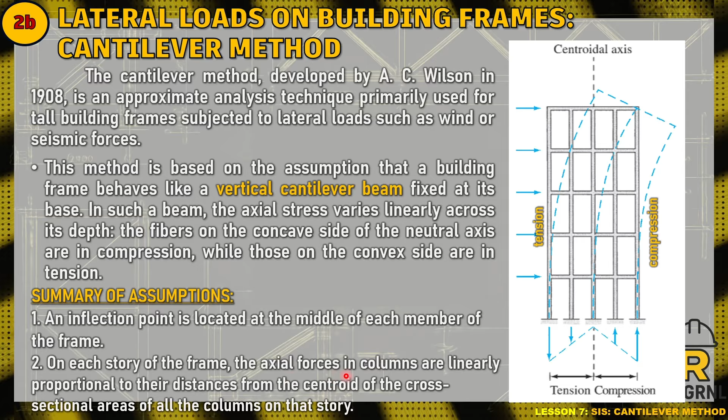In such a beam, the axial stress varies linearly—it's really stress originally. So we had the assumption that on each story, we deal with axial forces. Why forces here? Because it becomes axial force when the area of our columns is constant. But if the column areas aren't equal, it's really stress, which is force over area. That's our symbol for stress. So if we get the maximum or the centroid here, that's it.

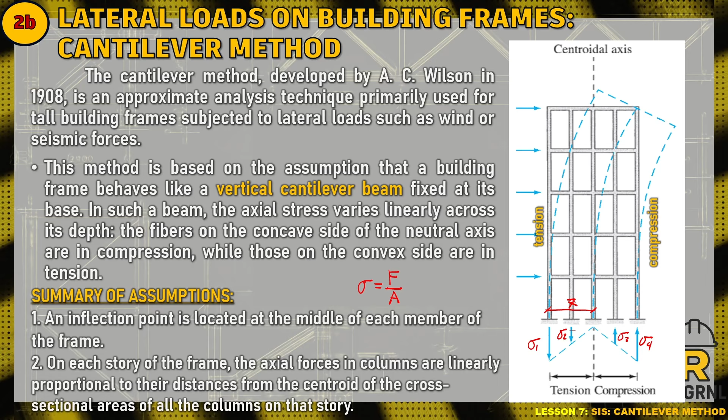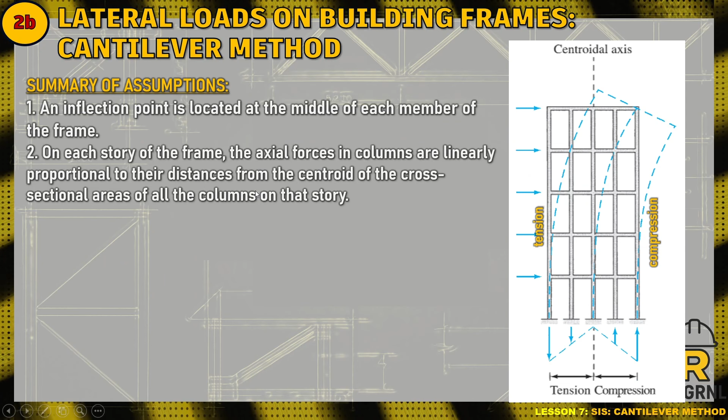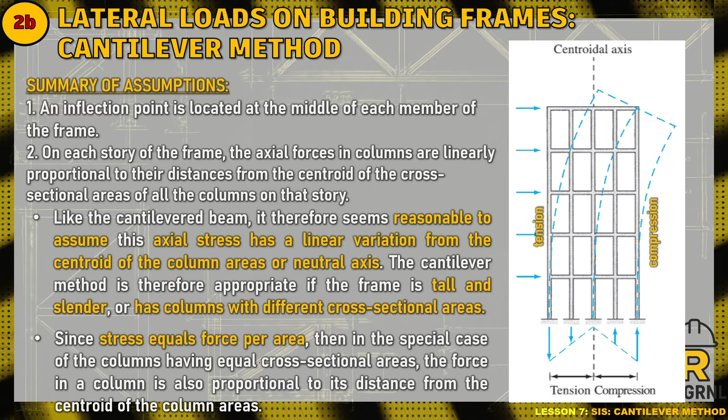Now let's add the concept that it's axial stress. Therefore, stress equals force per area. In the special case where columns have equal cross-sectional area, we just use force.

To verify and familiarize, let's do a sample. We get the reactions of each member until we find the support reactions. Notice it's a three-bay frame with six portals—first time we're solving this. We have an external shear load applied from the left, then we have the area per column.

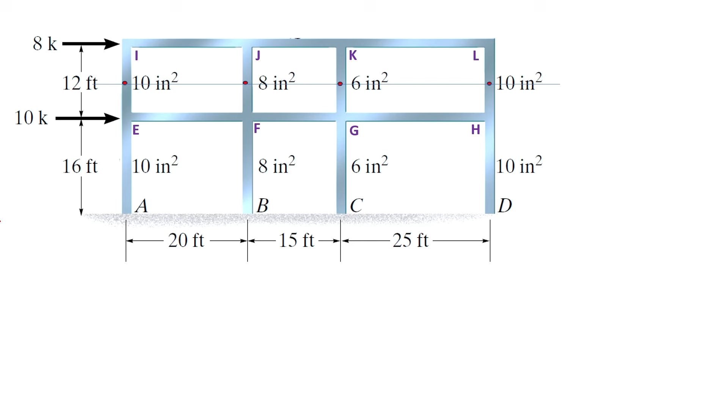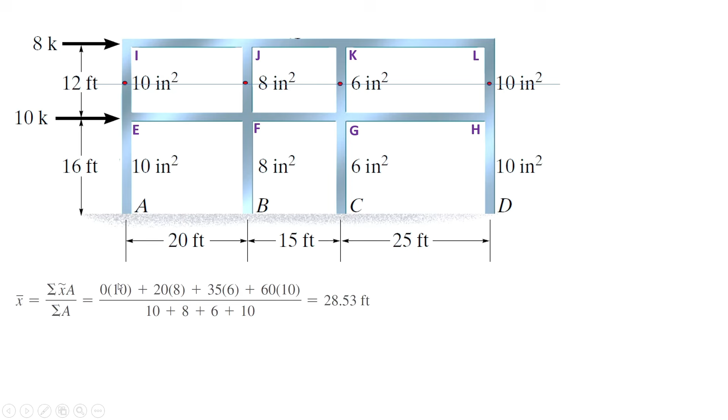From column A, the first column, its area is 10. This is the area, and the reference is 0 since we start here. Next, column B to J has area 8, times 20, the distance from the reference point. Then next is K, C, G with area 6 times 35, the distance from the left support. Next is 60 times 10 area.

Overall, the total area of all our columns: 10 plus 8 plus 6 plus 10, looking at this, giving a total of 28.53 measured from the left side—so it goes past the 20 feet mark.

Let me give this knowledge again: when discussing column axials, the part on the left side is under tension due to the load from 10K to 8K—it tends to push the building. So the support reaction needs to react in tension. My tip: on the left side of your centroid, everything is in tension. On the other side—since it's just split in two—it's in compression, like it's forming a couple.

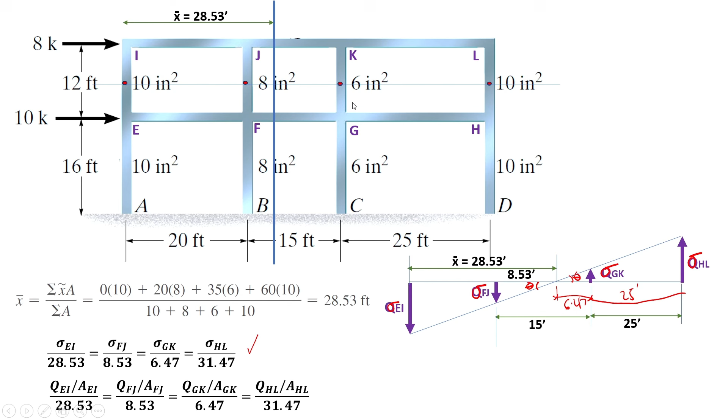Now, since it's stress and the areas aren't constant, we use force over area. So force, Q, over area—along EI, FJ, GK, HL. Now, to validate the results, let's substitute the areas here. In terms of EI, QEI represents our Q values on the left side.

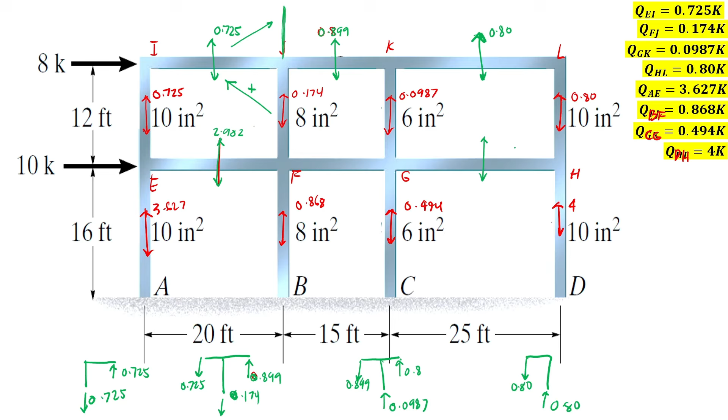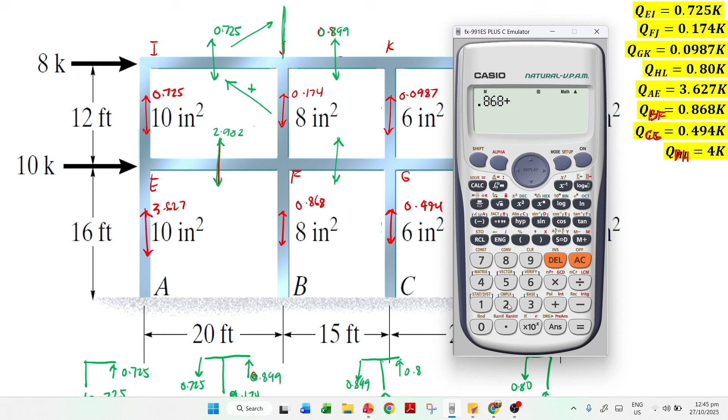So ngayon, dito na tayo. So parang ano yung pattern? I-add natin tong dalawa minus yung taas. So parang ganito: 0.868 plus 2.902 minus 0.174. Yan, minus B na sa taas. So 3.596, okay? 3.596.

I-double check natin sa kabila. Double check natin dito: 0.494 plus 3.2 minus 0.0987. Yan, 3.595. Parehas na, almost, so wala problema dyan. Sabihin mo na 3.6 lang yan. Okay, pwede na yan. So ngayon, tapos na tayo sa girder shear.

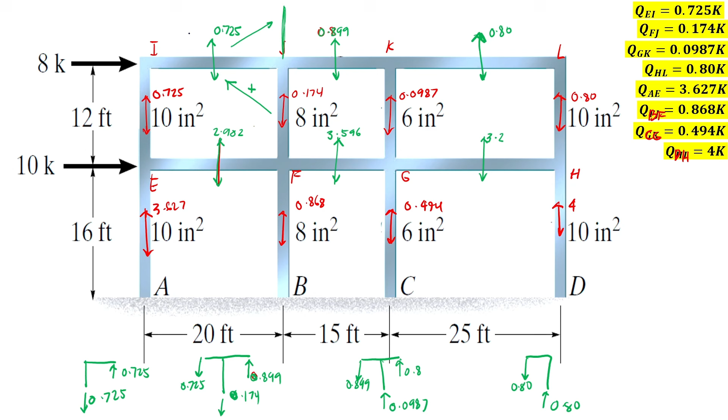Let's go with the column moments. No, girder moments. So pag moment, ang ginagamit mo yun na lang. So gaya pa rin ng dati, kapag dito yung force, so clockwise yung ating beam moment. Yan, lahat ilagay mo na para hindi na tayo magtagal pa. Kailangan natin magmadali, kaya natin to sa quiz. Yan, so gaya pa rin ng gawi.

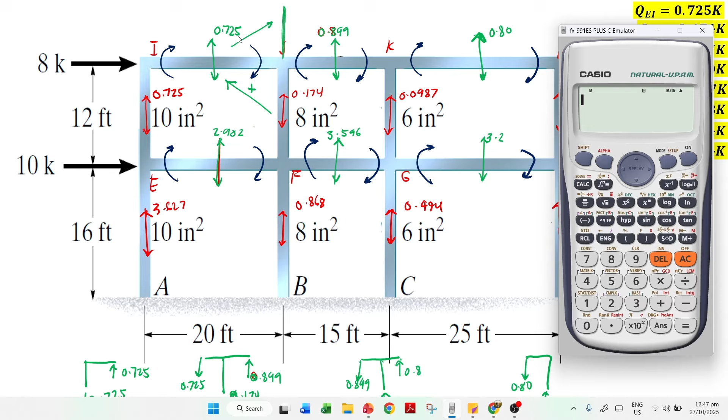Ang pag-compute ng moment is 0.725 times half of the length. So 0.725 times 10, so 7.25, okay, 7.25. Yan, 7.25. Well, this one: 0.899 times 7.5, dahil sa half ng 15. So 6.743, okay? 6.743.

6.743. Yan. Then we have 0.8 times half ng 12, ng 25. 10. 10, 10, oh diba? Well this one, ganun din. 2.902, mabilis lang yan. 2.902 times half of the 20, 29.02. Oh, 3.596 times 7.5, 26.97. 26.97, and then 3.2 times 12.5, 40. Yun, okay? So girder moments.

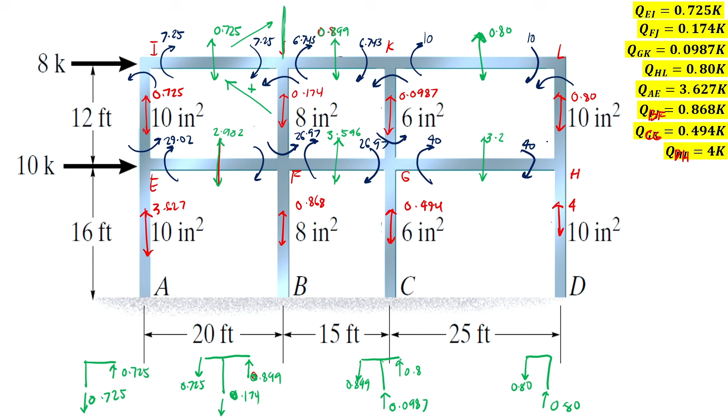Next, column moments. Isasalin mo ngayon to. This is clockwise ha, tandaan natin, lahat ng column ngayon, counter. Lagay mo na lahat, walang duda dyan. Counter yan, okay. Counter, counter, counter, counter.

Yeah, so paano naman masosolve yung moment ng column? Okay. Dash T. Okay, dito, yan, unahin natin yung magkabilang kanto. So gagayahin mo lang yan: 7.25 yan, tapos dito sa kabila, 10, 10. Okay, papunta naman tayo sa loob.

So ngayon dito, tingnan mo tong joint J. So ilan ang kulang para ma-balance dito? So we have same rotation dito sa beam, so i-add mo yun, yun lang. I-add lang natin yan, plus 6.743. Yan, 13.99, so sabihin natin 14. Okay, so dito naman, i-add mo lang din yung 10 plus 6.74.

So 16.743, isali mo dito, 16.743. And we have 14 here. Okay, so ngayon pwede mo na masolve dito.

7.25, 29, so this is oppositely naman, ibig sabihin ima-minus mo naman dyan. Sundan nyo lang ha: 29.02 minus 7.25, 21.77. 21.77.

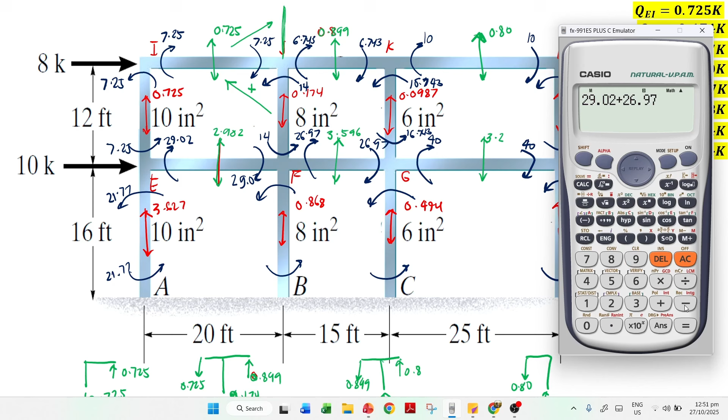21.77. Okay, while here, so we have 14, this is 29.02, so i-add natin. 29.02, add lang to, same sila ng beam eh. So 26.97, i-minus mo nga yung 14, kasi opposite yung 40. So you have 42.

42 dito. While this one, so 26.97 plus 40 minus 16.743, so 50.227. 50.227, 42, meron na pala. Yan, and this is, yan, oppositely directed, so 40 minus 10, 30.

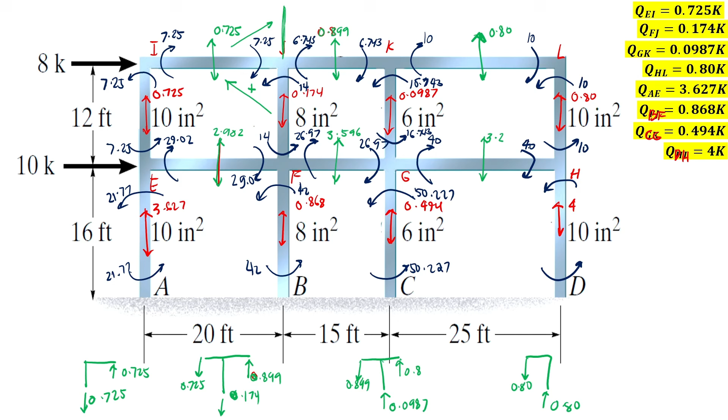Yan ang column moments. So pwede mo naman makuha yung reaction actually. The reaction is the same as here. We have 30, 50.227, 42, 21.77.

Tapos pagdating sa axial shear, axial reaction, pwede mo na makuha yun. So tension dito, no? So this is 3.627. Tension dito, 0.868. We have compression dito, 0.494. And we have this compression here is 4. So 4 po dito. Ganyan yung ating reaction.

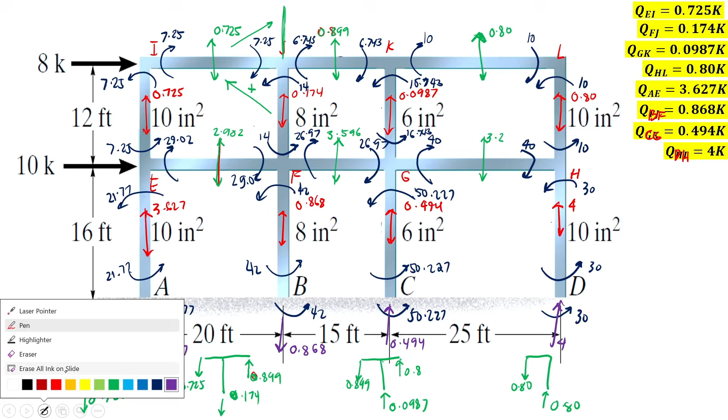So girder ano na lang, axials, girder axials, tsaka column shears. So for that, yan, meron tayong red dapat. Para dito, yan ang huli. Yan ang huli, yan ang huli.

And gusto ko ipabaya na to sa inyo, no, para magkaroon kayo ng practice para sa quiz nyo. Yan, so mula umpisa, gawin nyo ulit ng malinaw, maayos. So at least meron kayong background na kapag may area na yung ating columns. So kasama sa quiz to, pero hindi ko gagawing tatlong bays, no, doon lang tayo sa dalawa. O pwede natin gawing portal saka cantilever ang isang frame sa isang quiz. So okay lang yun, at gawin natin ng mas mabilis. So mag-practice pa kayo ng marami. Kung meron kayong tanong, magtanong kayo. Salamat po.